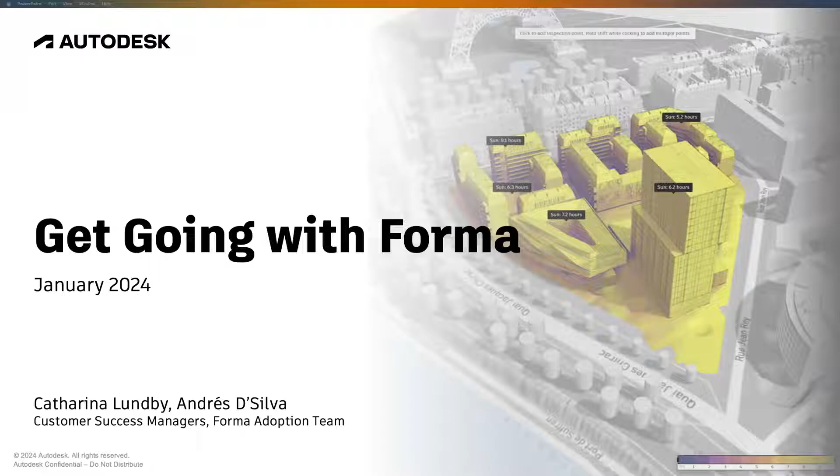We recently started running a new version of this webinar based on feedback from previous attendees, where it was asked that we do less talking with slides and more hands-on work in the software itself. So we'll be doing that today as well with a site in San Francisco.

So the agenda will be as follows. We'll start with some practical information, and then we're going to jump into Forma. As mentioned, we'll be working on a site at the San Francisco waterfront, which is actually the location of the Autodesk offices there.

It was recently also the case example of a Forma design contest that we ran, so we thought it would be fun to reuse it. Neither Andres or I have been there before, but we hope to get the chance to go to San Francisco at some point. And then at the end, we will leave some time for questions as well.

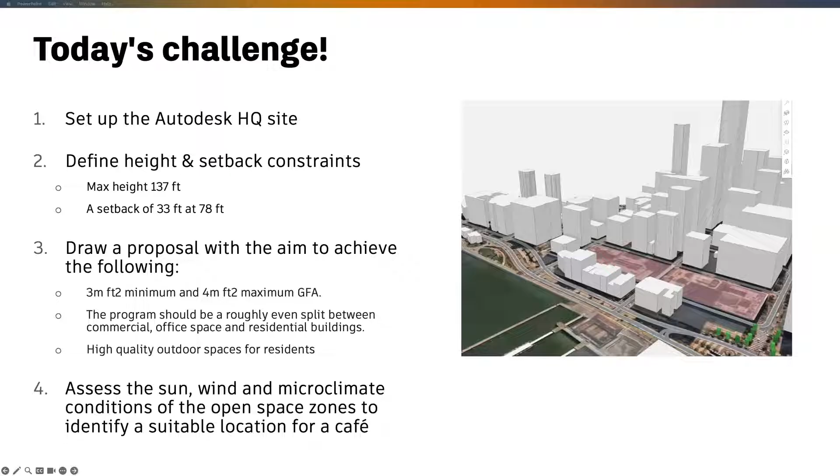Excellent. Thanks, Catharina. Great.

So sharing. This is our current demo hub. Just to bring, for those of you who are maybe not as familiar with this, you are basically able to join several hubs, either through your AEC collection or standalone licenses.

You have your projects here in current view, that's showing only my recent projects. There's also a members page illustrating where my colleagues are located as far as access types, and external collaborators will also be listed here. And then some more general hub settings for those of you who are an administrator for your hub.

Currently, my recent projects show a similar project, the webinar. But below this, there are more learning resources aimed at bringing you into the project, whether the demo project or your own project, to step by step show you how you can use Forma. And yeah, I'd also advise you to do this after this webinar.

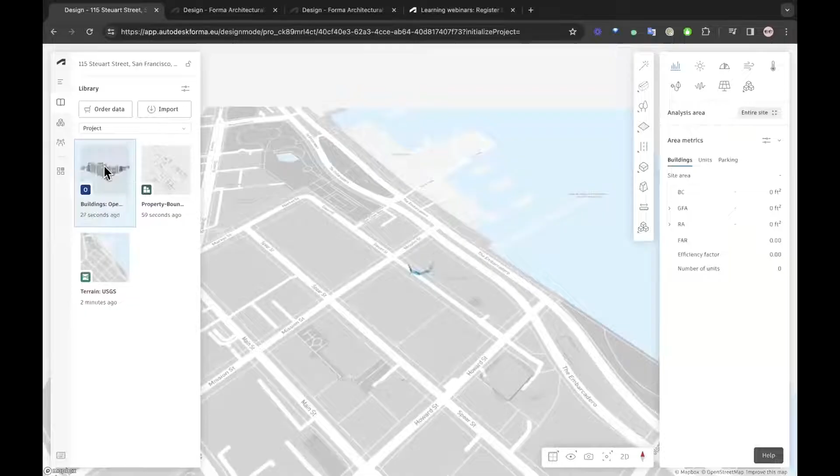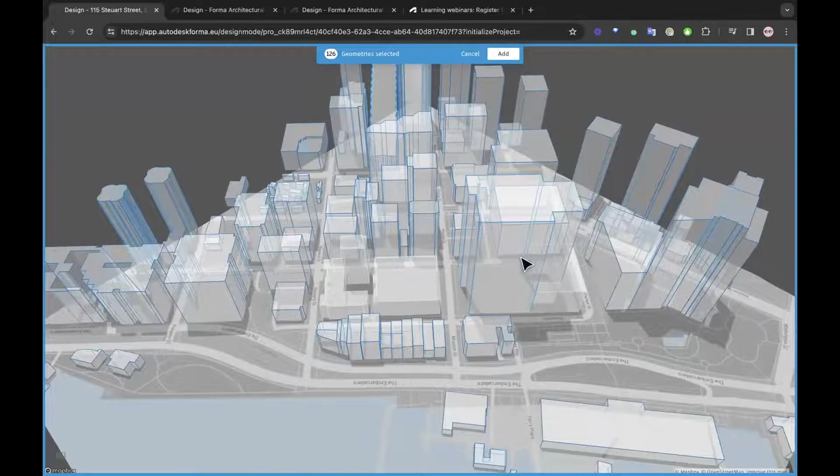So for our case, we wish to import the surrounding buildings and sort of leave a blank site for our new development. So I'll hold Shift and deselect these buildings. As you can see at the top, 126 geometries are selected. If I was keeping all, then these would also be added, and it would add up to 131. Great, so this is looking a bit more like a new development project, blank canvas.

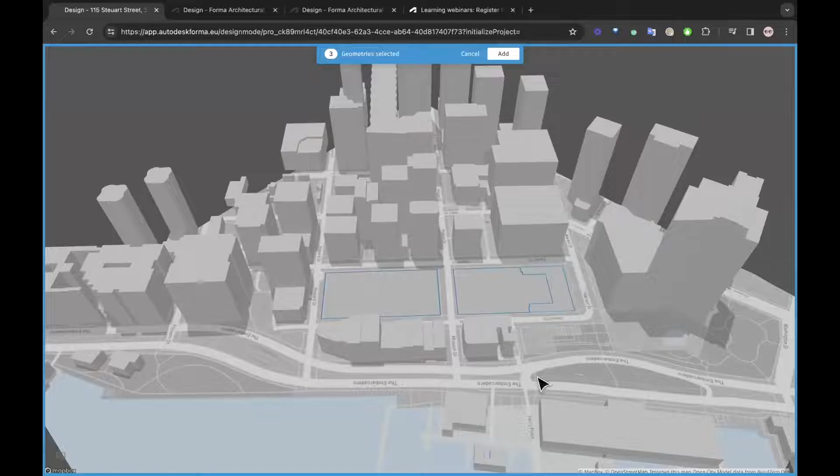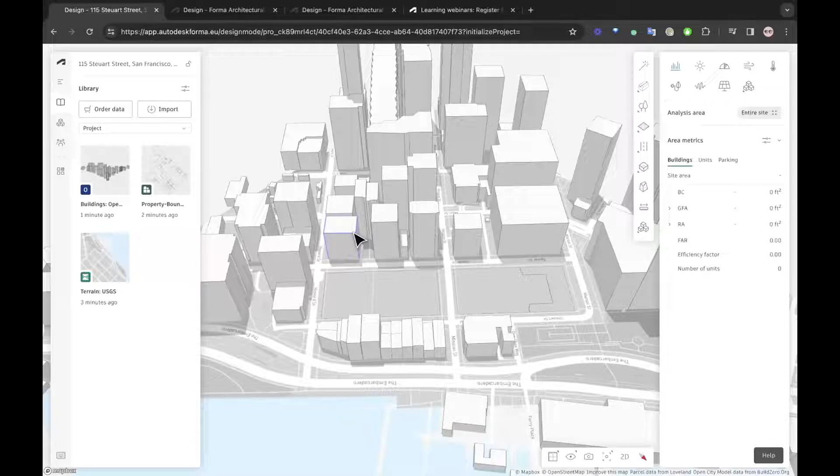One more data to add is the property boundaries. Again, same logic: you can select and deselect as you see. We're gonna go ahead and just add our immediate surroundings. And then it's good to maintain awareness of what this is actually meaning when we're dressing up our project.

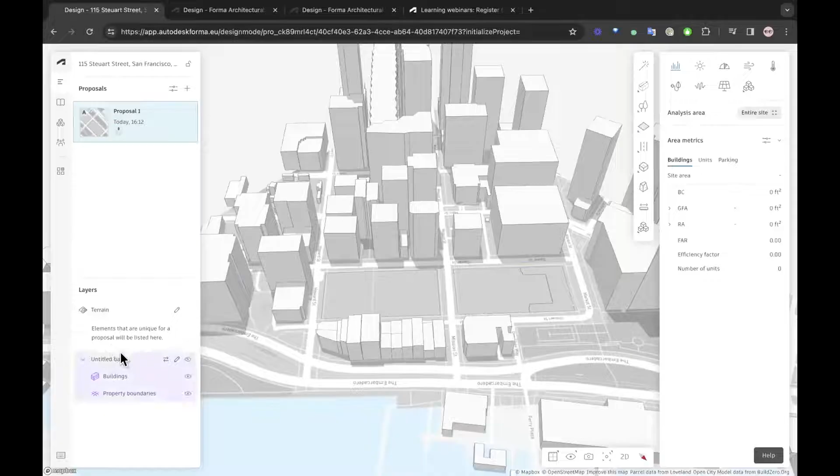To do that, we'll go back to our navigator. The navigator is part of our left-hand menu. It shows us what proposals we have and what layers we have. The layers that exist in Forma are either organized at the base level, so a shared component. If I hover above the edit button, it'll showcase a bit about what this base means. As you can see, the buildings and the property boundaries were automatically added to the base layers.

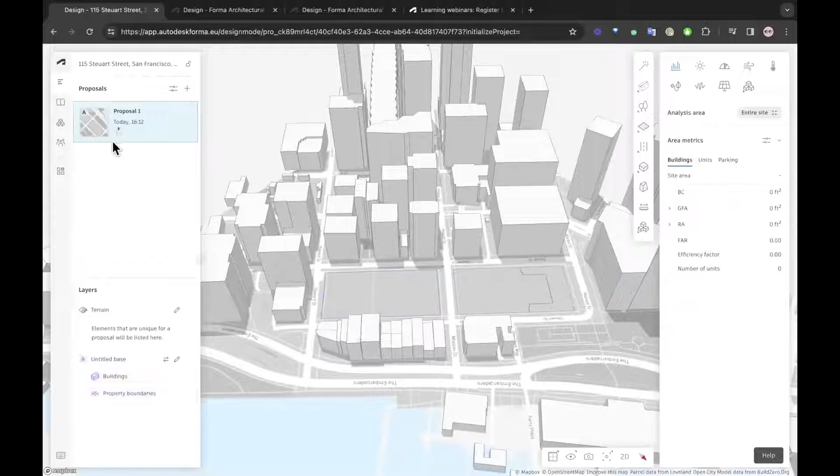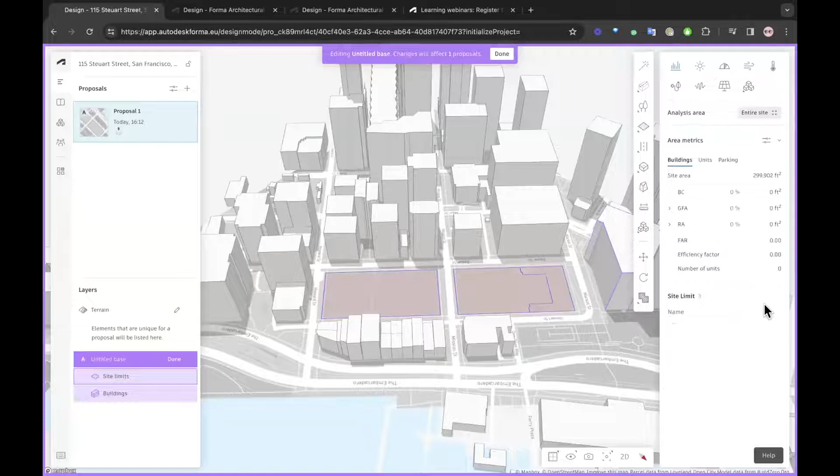And if we were to design a concept, they would be added to our proposal layer. This will be more evident and clearer as we progress. But to begin with, I will click Edit Base. I will select these two or these three site limits, and on the right-hand side, use the option to define these geometries as site limits. These are now also appearing red, just to illustrate that that's been done. And I can also see here the square footage for the site area.

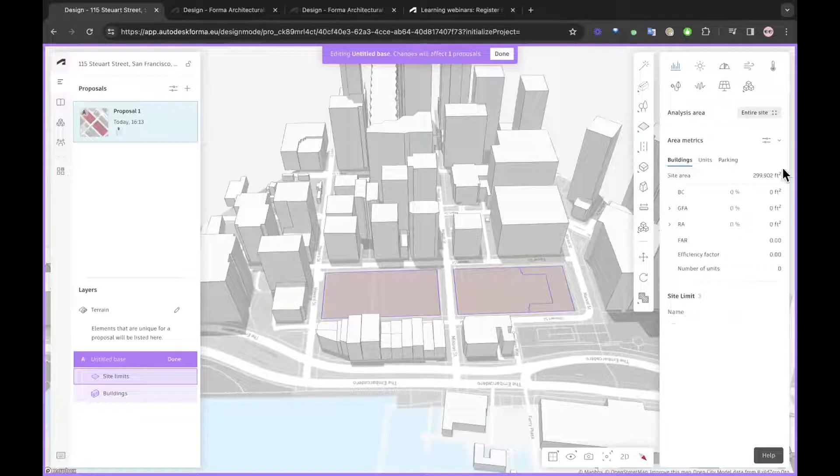So that's our first step. If I go back to my notes on what this challenge was all about, it was setting up the site, but then also starting to design some constraints.

We have a few constraints on these parcels. Typically you'd bring up your limits in the toolbar, part of the Forma user interface. You can navigate site limits, and design using property boundaries that were ordered, or draw them manually. I'll illustrate that on a neighboring plot.

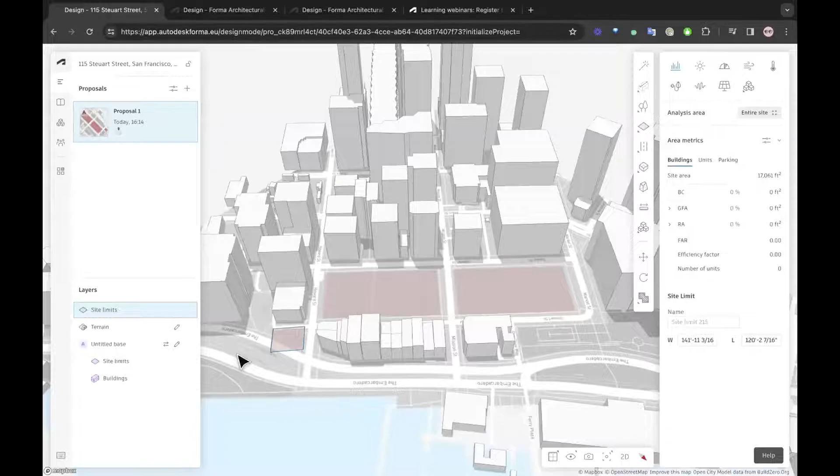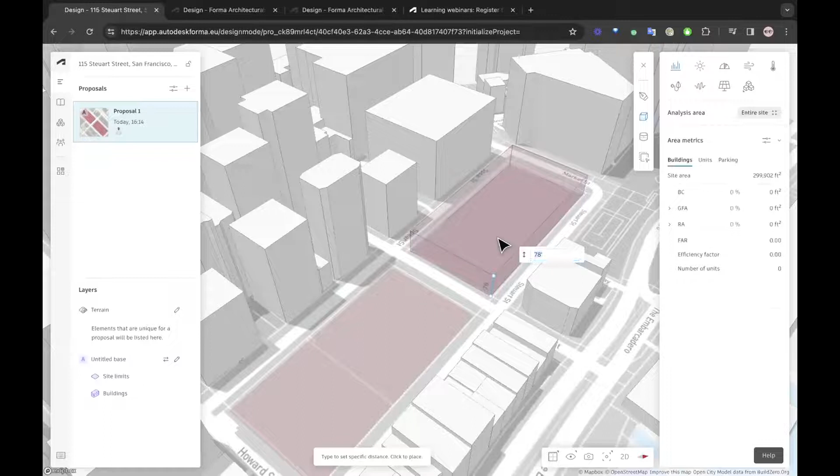This is essentially the same function using freehand tools. But for constraints, we'll scroll down to constraint and draw this using a cube as a shape. We can lock and snap to existing geometries, so I'll create a base replicating the site limit and adding 78 feet here. Then I'll select the direction, which is up.

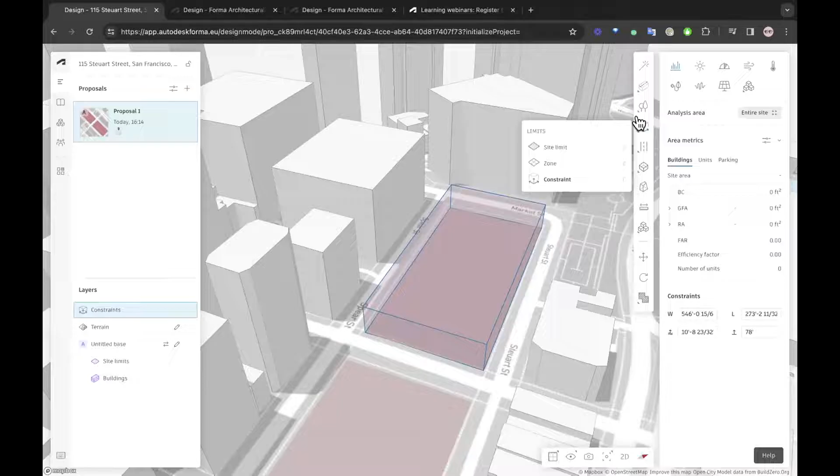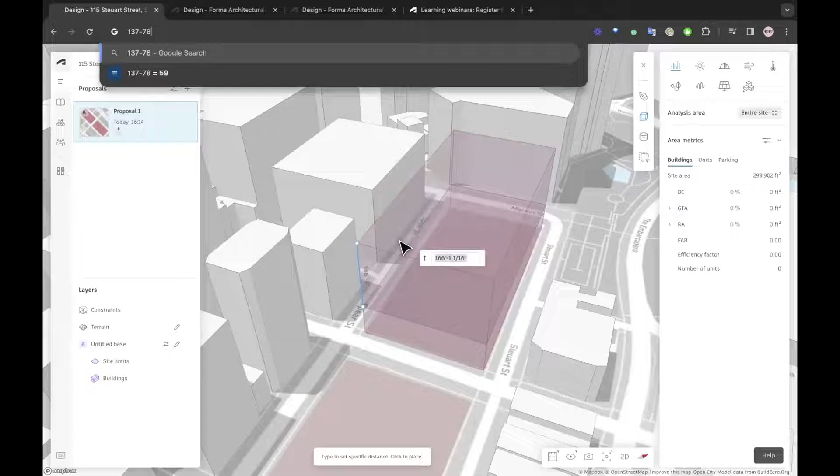So the setback was 33 feet. We'll build that on top for the moment. Then 137 minus 78 is... 59. So we'll go ahead and add this.

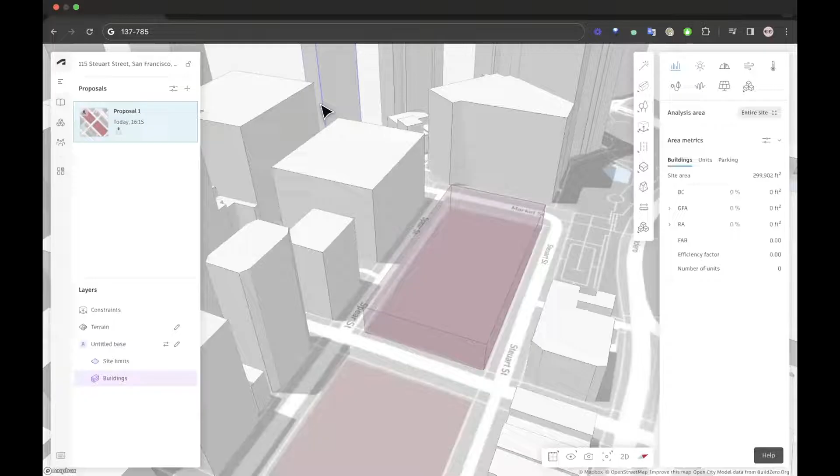Let's see, do that again. If you want to repeat any action, there's a nice tool I like to bring up called quick access. It tells you that if you want to repeat the last tool, the key is to press spacebar. So instead of finding constraint again, I can just press spacebar if that was the last thing I used.

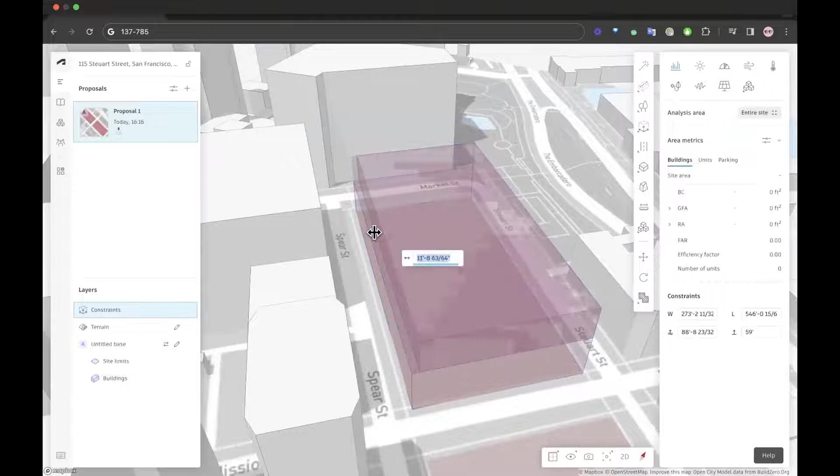So 59 feet up here, and then we'll drag this in 33 feet. Great, so this is our building envelope, or constraint, whatever you want to call it.

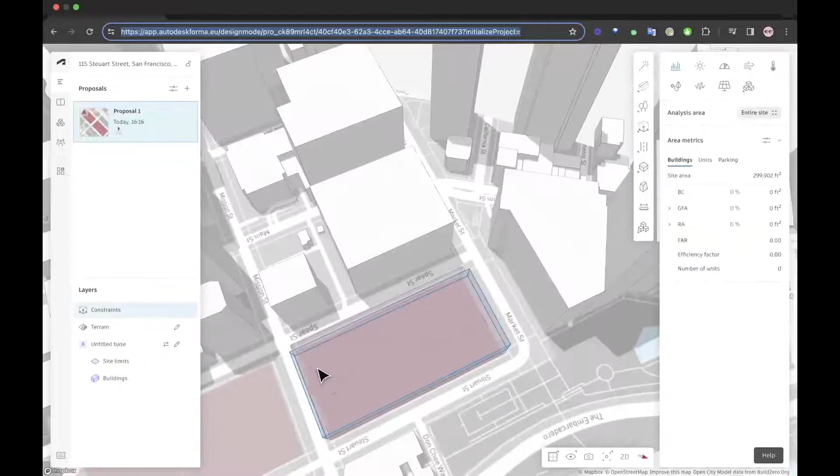What we'll go ahead and do now is assign some volumes. There's already some pre-made ones, but for this project we're going to design two buildings, one for office and one for commercial spacing, functions we wish to keep track of. We want to design volumes at a very abstract level, but also maintain a certain level of control.

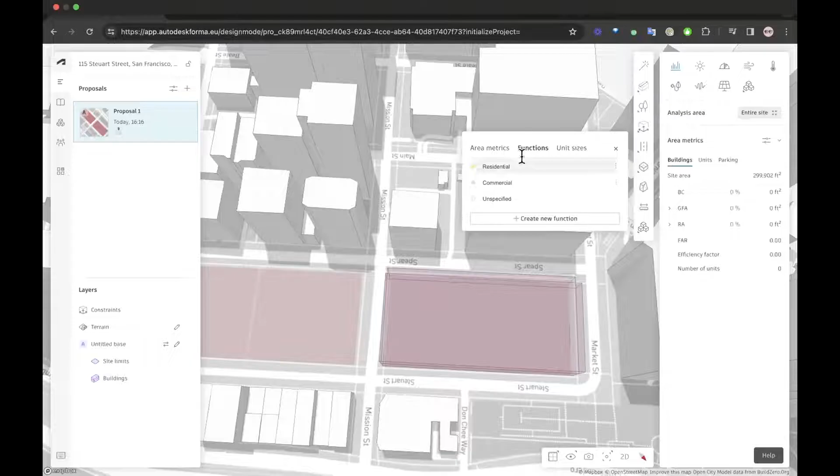To do this, we'll bring up our toolbar on the right, area metrics, displaying our functions. The default functions in Forma are residential, commercial, and unspecified. We wish to create a new function with a different color - it was commercial, office space, and residential - so we'll type office.

Here you can define different area calculations based on ratios. We can also use area metrics to create further metrics assigned to all functions or specific functions. So that's added here, and we can go ahead and design something.

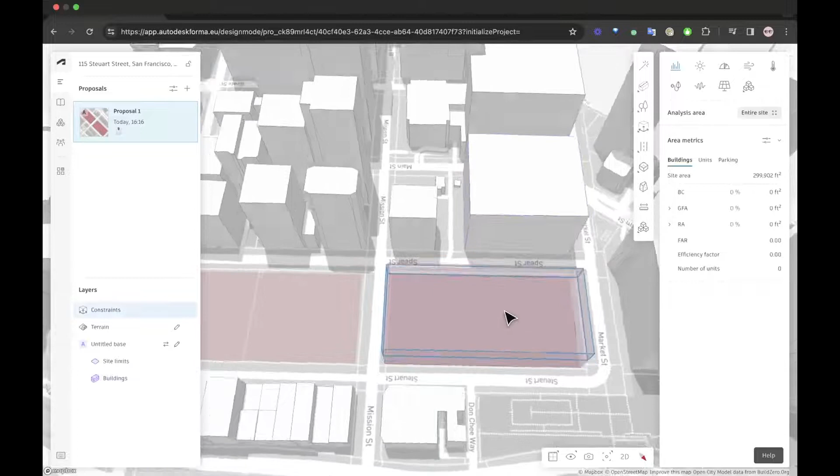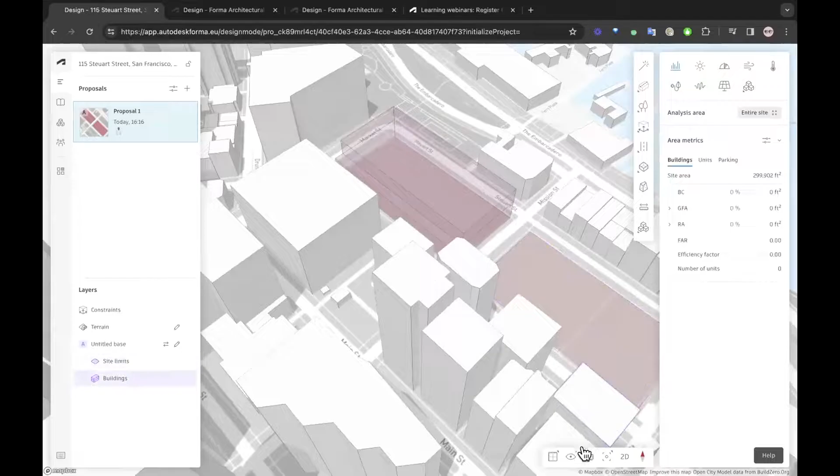Design tools are in our right-hand panel, with more tools on the left-hand side - we'll capture a bit of what they are. On the bottom right we have our map tools: we can show north, toggle between 2D and 3D, and save certain camera positions, which is useful if you're creating a report for a meeting. Let's see, here it is, save camera position.

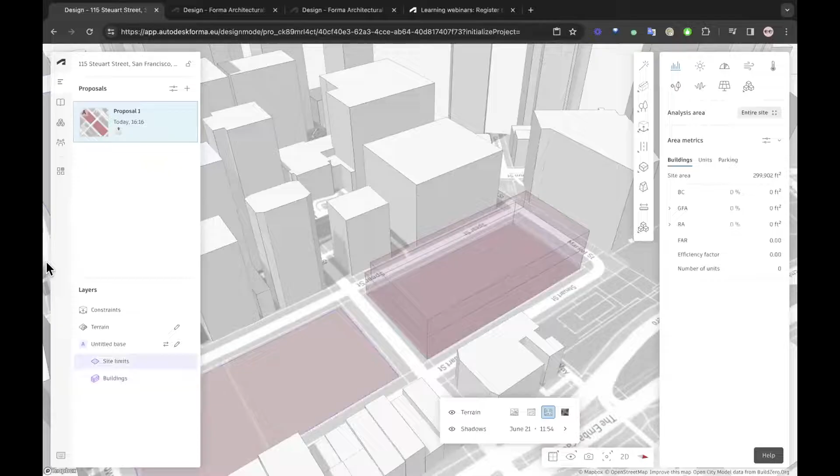And it's saving. We also have various display views, so you can showcase different shadows, and select terrain as an underlay. There are also, for everyone who's been testing it out, a nice extensions menu that enables you to add more functionality beyond what Forma has out of the box.

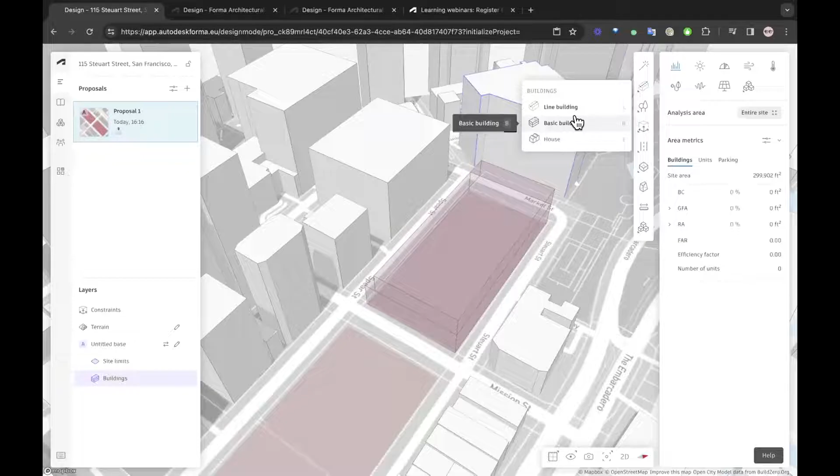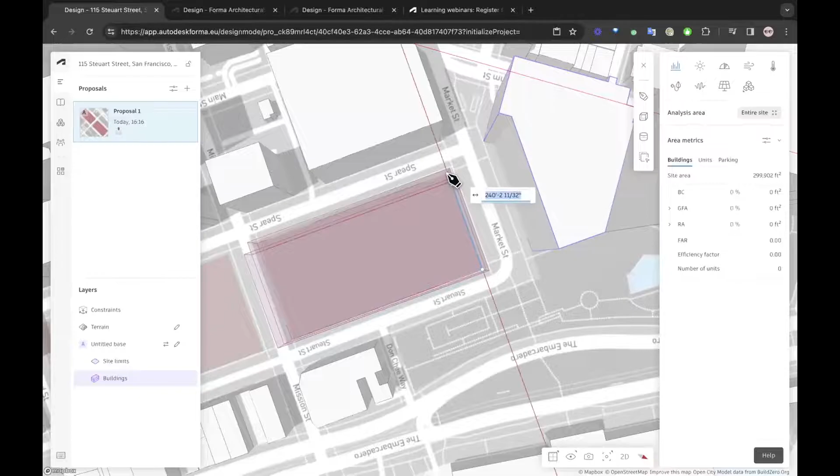But to begin with, we will design some volumes. So we're drawing a basic building, which is essentially a footprint with a height. We'll go ahead and lock that to our constraint here.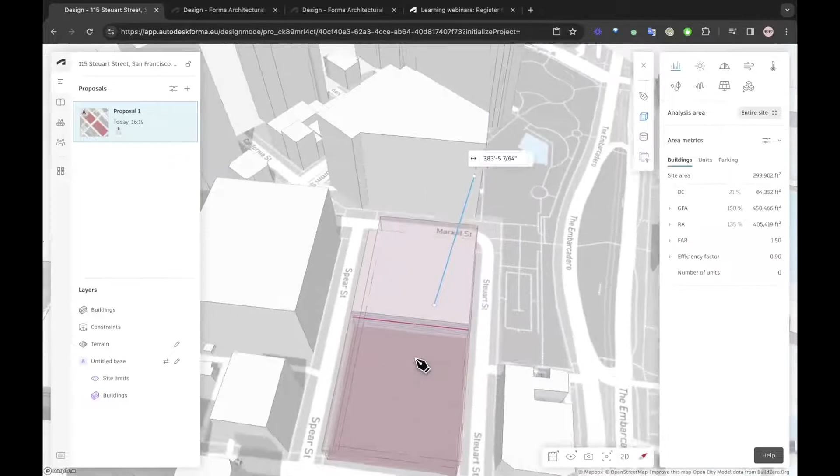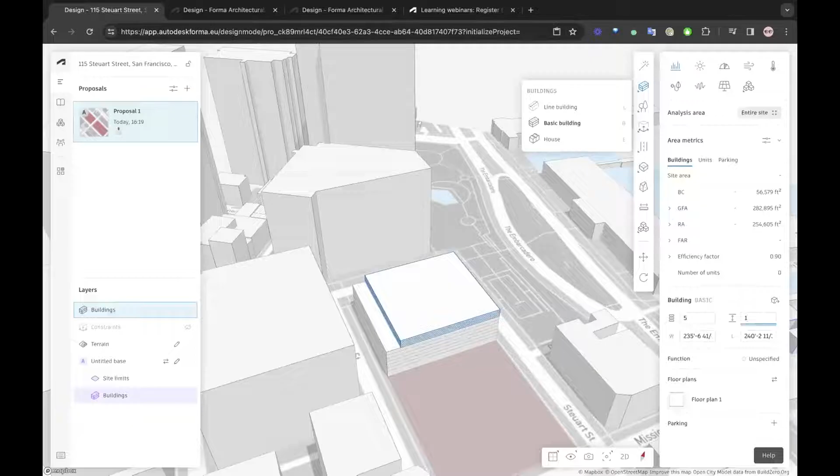Should I use the repeat, so I notice? We'll lock this. Yeah, okay, not perfect, but something close. Let's see, this was 10 feet perhaps. Yeah, great. So you can already see that the first floor here is actually slightly higher than the remaining floors.

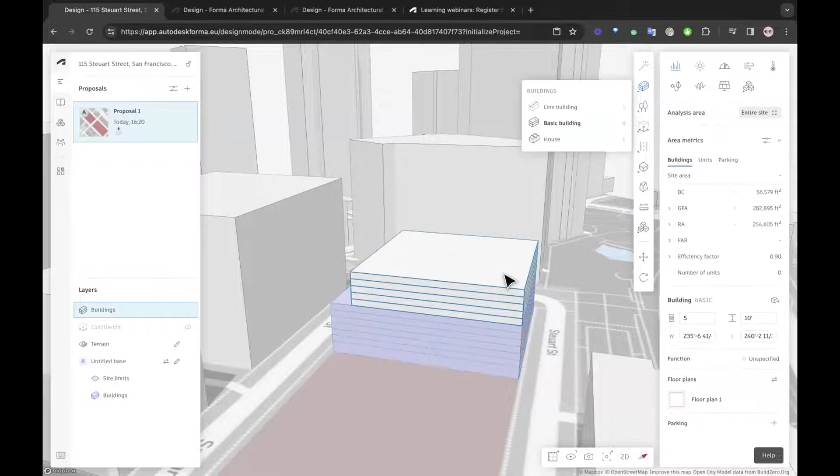That's actually quite intentional - that's typically the case. We'll change a function by selecting the roof of this first slab and assign it to, say, commercial. Then we'll select this slab and assign it to office.

What this has given me already, through the analysis of area metrics, is a breakdown on rentable area and gross floor area. If I select the entire site, the analysis area shows the building coverage, both in percentage and square footage, the gross floor area per function - commercial and office - and again for commercial and office on rentable area.

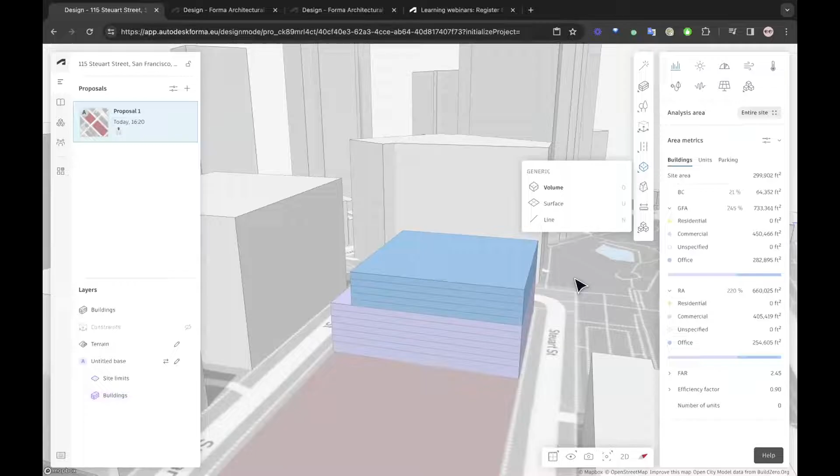We'll go ahead and draw one more volume before we switch into some more pre-made volumes that are a bit more suitable for our next phase of analysis on the site. I think this was something along this line.

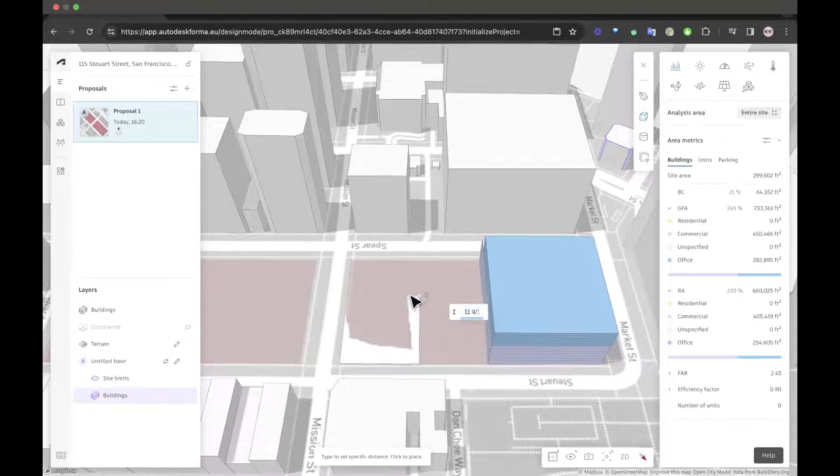And we'll snap this. Okay. Yeah, I'm actually not too sure. This was signed. Yeah.

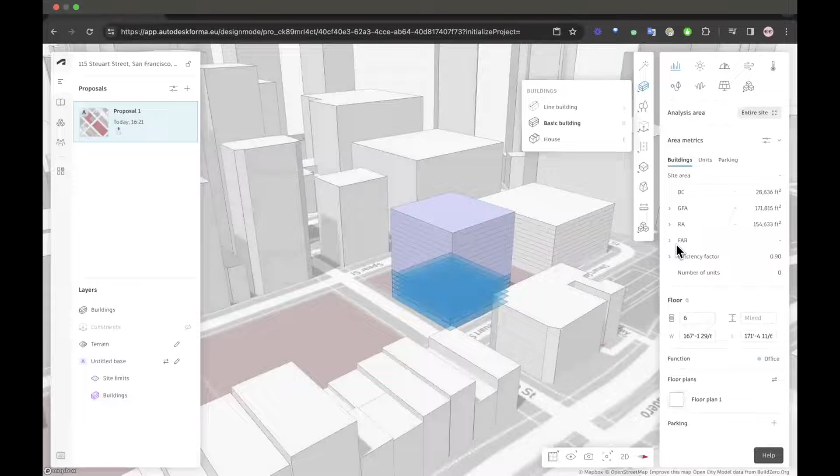Great, so just as a recap, we've started adding volumes to a project that we've defined with constraints. We've also brought in a lot of different third-party data, and wanted to showcase this to another colleague, so we'll go ahead and make them a collaborator. For project level access, you can also just copy an invite link—I believe it's valid for about 7 days or so. If I make a viewer, I can copy this link and share it here in the chat, and for those who feel free to join, you can join.

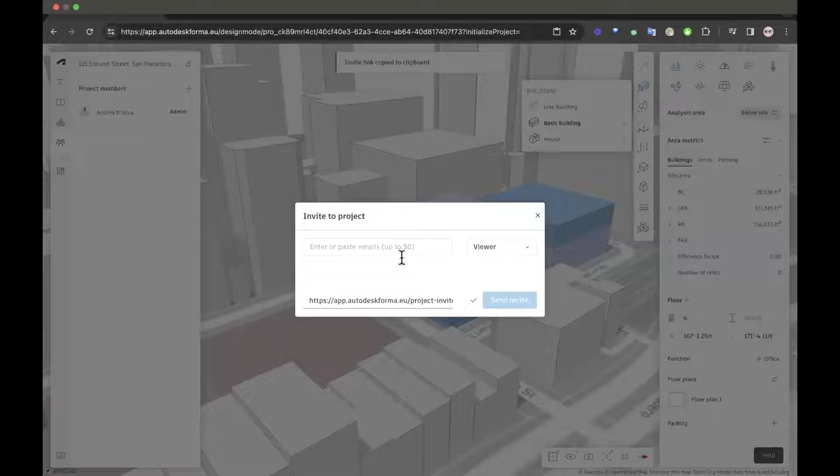Main idea here is, again, making everything cloud-based and easy to use.

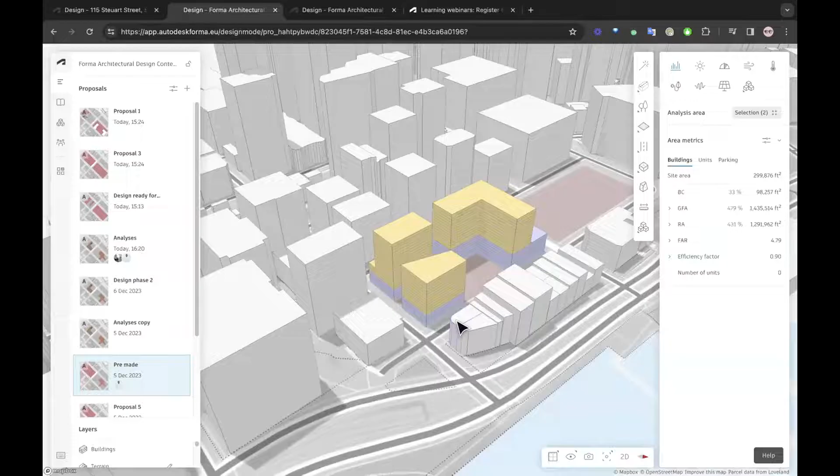Let's go into what we had pre-made. So this is buildings that Katarina has nicely modeled ahead of this webinar, and it's our left portion of the site, and then there is the full analysis or full project, which is again trying to build on from what we started. Additionally, there are a few vegetation elements that are, in this case, primarily for aesthetics, but could also be used for simulating differences when running wind analysis or solar analysis, to ensure that shadows play a role, or even for microclimate analysis, which is more and more a topic from our customers.

Great, I think that's where I turn the screen back to you, Katarina.

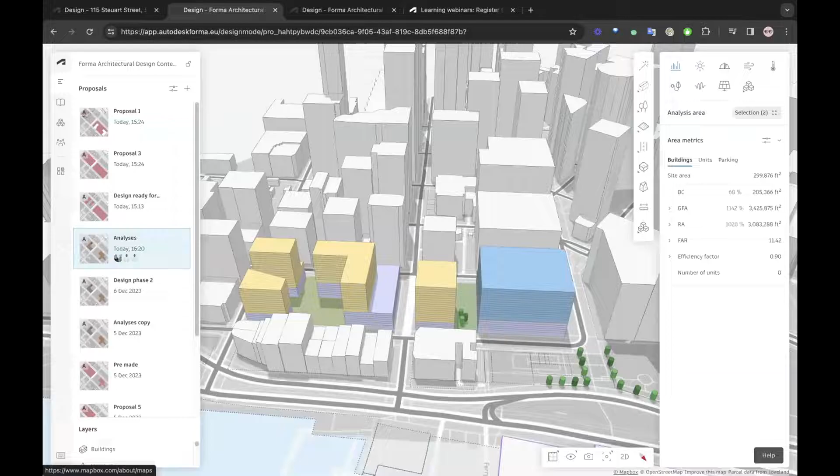Yes, wonderful. I just wanted to take a minute, Andres, to try to address some of the good questions that popped up in the chat. There were some really good ones. Just give me one second, because there is a link I wanted to share about product updates, where it's possible to see what we're working on currently and learn more about the roadmap. So let me share my screen with you. Great questions, by the way.

All right, can you see my screen with the Forma forum? Yes, sorry. Yep, we do. Can you, audience? Yes, absolutely.

Okay, awesome. So we had a couple of questions in the Q&A window. First of all, who is the target audience for Forma? Great question. So the target audience for Forma is really any professional working with early stage design and planning, so in the design and concept phase of projects. For example, an architect or an urban planner, but it could also be others.

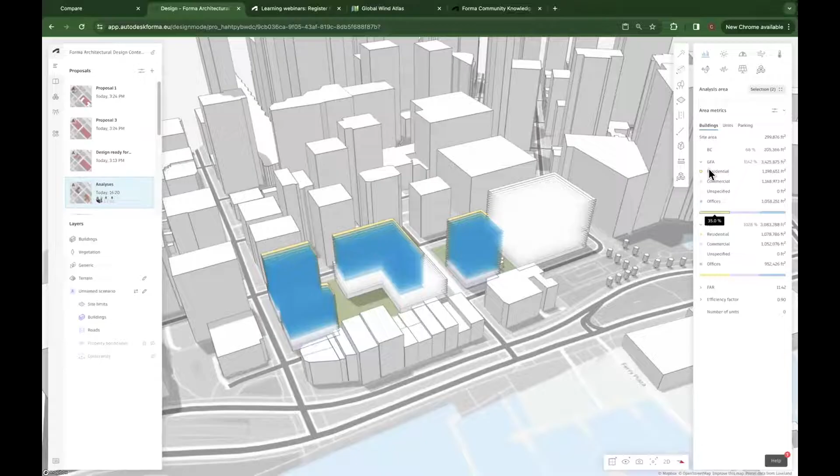Andres went through briefly the area metrics. These will vary by country. If you aren't familiar with rentable area and gross floor area, these are specific to the US because that's where the project is located. But if you're in Europe somewhere, this would be in meters, and you'd see slightly different metrics depending on where you are. So this is where you gain insight about that. Your unit count, we haven't drawn any units here but we could have, and also parking if you had drawn that.

And then there is sun hours, daylight, wind, microclimate, operational energy, noise, and as of quite recently, solar energy as well. Some of our channel partners are working on interesting new capabilities as well here. That's one of the main strategies of Forma, to build an open and extendable software so that third parties can provide more, perhaps local, analyses for instance.

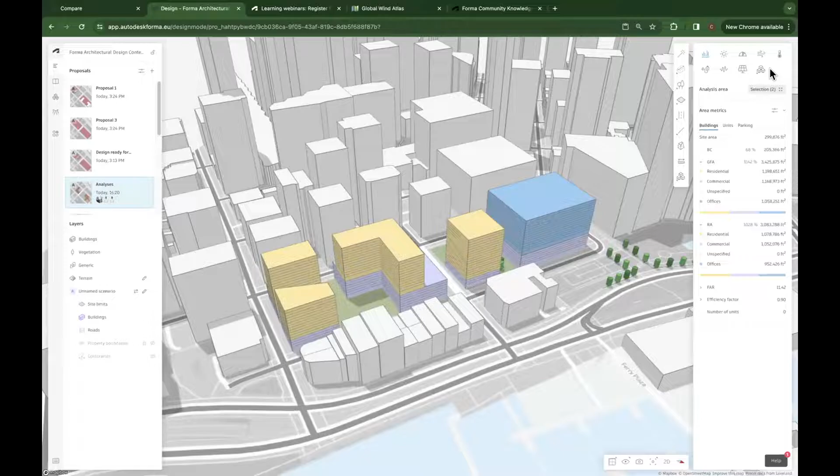So what I wanted to do now is take a look at some of the analyses, and we can start with sun.

The way the analyses work is that you have to choose the area you want to analyze. We can do that via the little selection window in the top right-hand corner. By default, we select the site limit, but you could also draw a zone. Via the limit icon here, you can see site limit and then zone, if you wanted to, for example, just analyze one side or the other, or a much larger area.

Selecting the site limit, though, means you're going to see the sun analysis just on the site limit, but of course the surroundings are taken into account, so in terms of shadows and so on, that's taken into account.

Then you can choose the analysis date. We've selected two dates here, but you could add as many as you want: March 21st and June 21st. Then you run the analysis. Depending on which analysis it is, it will take anything from 30 seconds to a couple of minutes. For the wind analysis, it can take up to an hour or even more because it's very heavy, but there we have an AI-based rapid version as well.

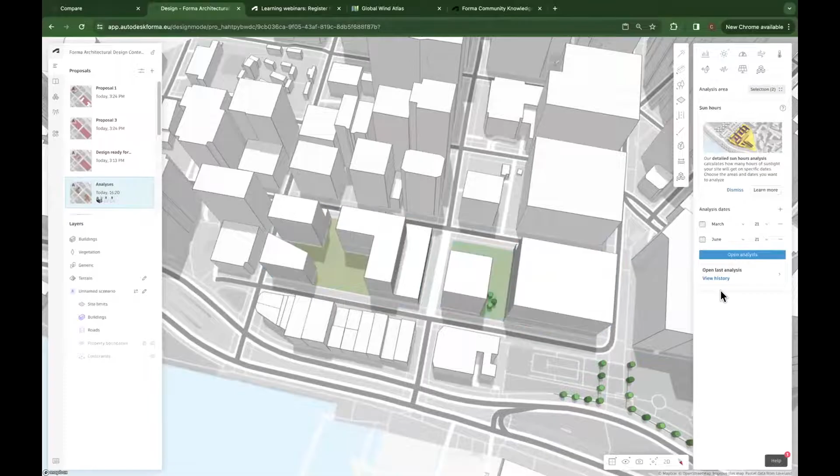So there we go, it's ready. Let me see, I've got my Zoom window slightly in the way. Open analysis. There we go.

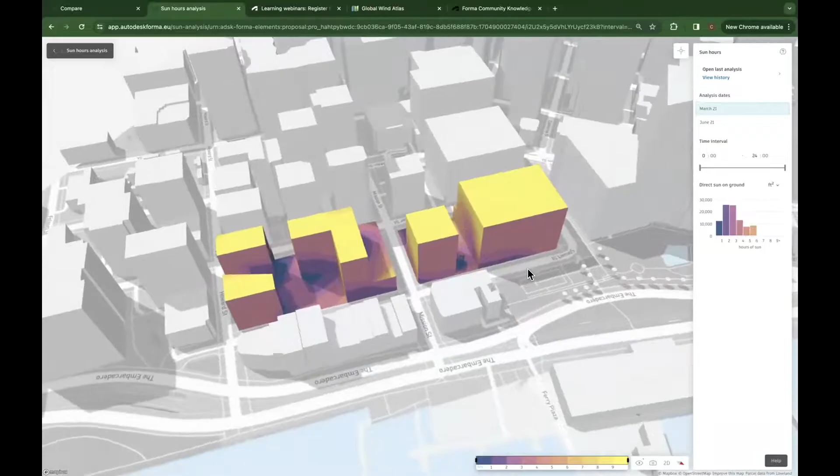All right, so we are now inside this analysis mode. What we're looking at is the number of direct sun hours on the facade and ground on March 21st, between these hours and these hours, and you can change the time interval as well. The colors correspond to the number of hours, so you can see this little scale bar or legend at the bottom. The darker the colors, the fewer hours of sun.

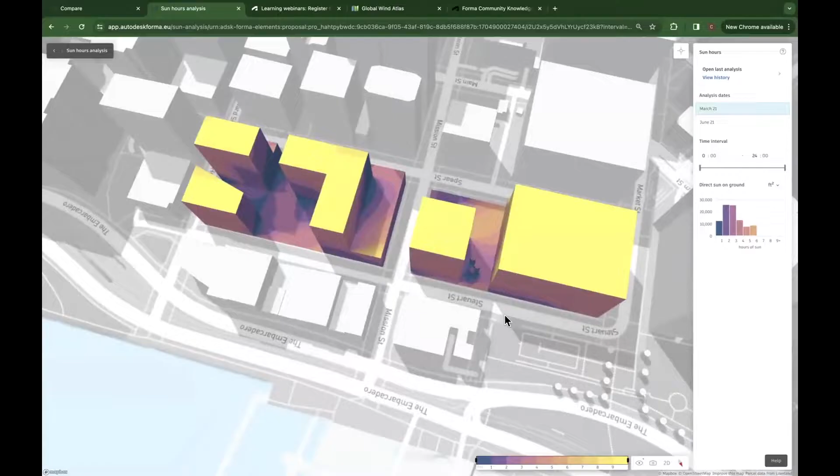So we can go ahead and inspect particular points. Maybe we want to view it more from a 2D view, if we're going to stay true to the case of trying to establish where we could put an outdoor cafe. You have this inspection mode in the top right-hand corner where you can click on particular points, either on the facade or on the ground, to inspect the qualities at that particular point.

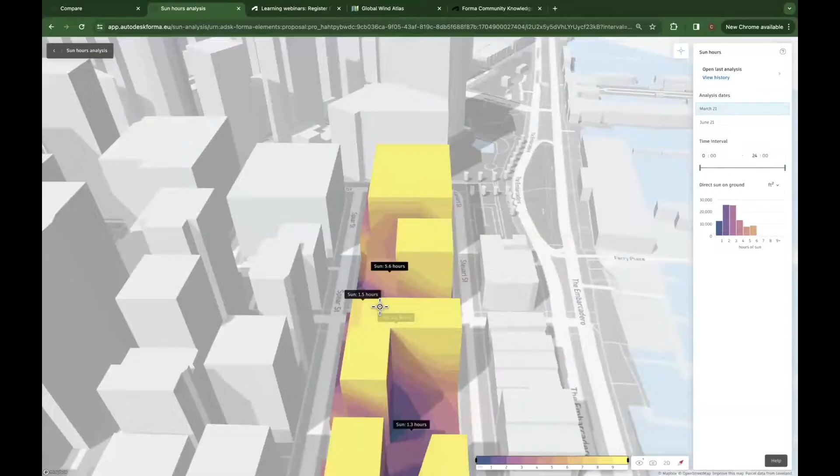So here on the south-facing outdoor space, we've got 5.4 hours of sun where I clicked, and then we've got 0.7 hours of sun between the two buildings here, so slightly poorer sun qualities there, unsurprisingly. Then we've got slightly darker north-facing facades than south-facing facades, but all in all, quite good sun qualities on the facades. And then we could also have looked at June 21st as well.

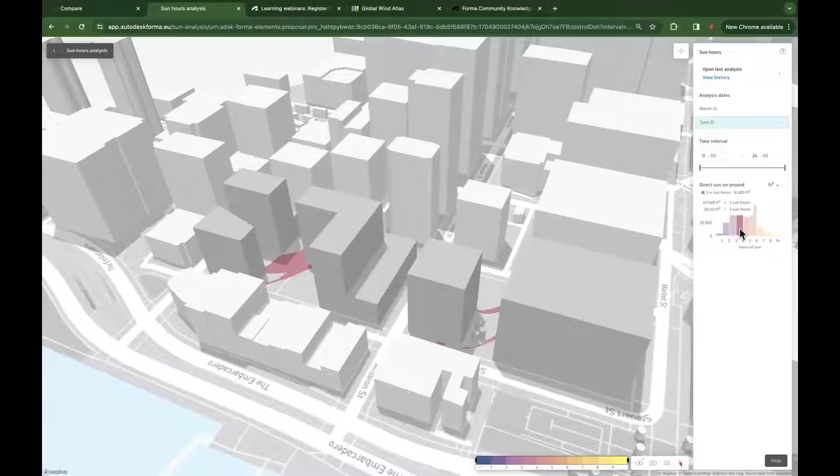If I switch the date, you'll get an updated analysis plot. On the side, depending on the analysis, you'll have different graphs and statistics presented to you. So here we have an overview of the number of square feet that are sunlit for a given amount of hours, in different brackets, which you could view in square feet, percentage, or square meters if this were in Europe. All in all, quite good sun conditions - we've got a really nice bright space over here.

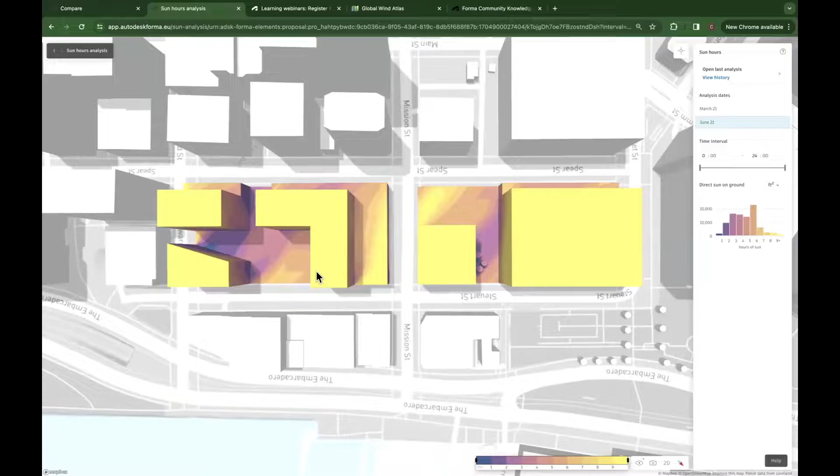Quite a nice courtyard in the middle here as well. Some challenges with sun between the two tallest buildings. So then I'm going to return.

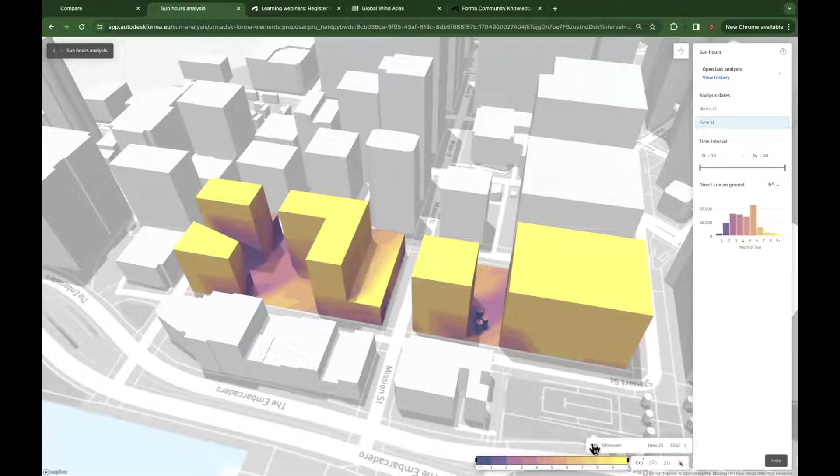One thing I also wanted to show you, you can filter on the legend here. So if you want to see, for example, all the areas with more than 4 hours, you can filter there. And you can also do a sun, like a shadow study at the bottom here, looking at different times of day.

Okay, then I'm going to go back. And the next thing that we can look at is the wind conditions. So the wind icon is the fourth one along. And here it's important to emphasize that there are two different analysis methods when it comes to analyzing wind, and also two different types of insights that we can get.

For wind and also for noise, we have a rapid version, which is the one that you see that popped up very quickly on screen here. And I think the best way to explain this is if I open up via the Help Center, because it's a good way of showing you the Help Center as well, via the Help button. If you type in wind and then open the introduction to the wind analysis, there's a little table here that explains the differences between the rapid and the detailed wind analysis quite well.

So the rapid wind analysis is AI based, trained on data sets that have been run using the detailed version. This can be useful as you're designing to get quick input. It updates in almost real time when you're changing the buildings, so it's good for giving directional input on your designs and seeing tendencies. However, if you want to document your results, to put in a report, for example, and you want it to be more specific, more accurate, more detailed, then we would recommend running the heavier version. Here you can see what technology it uses, the detail level, and so on. This is based on data from something called the Global Wind Atlas.

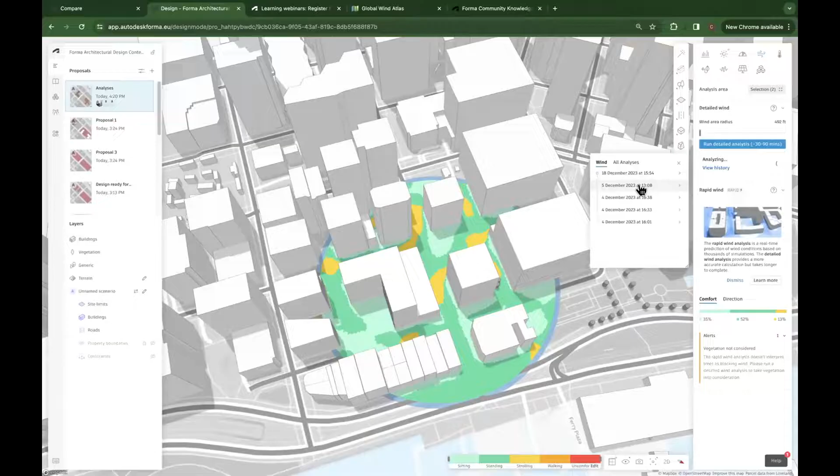So let's take a look at the detailed one. As you can see, this can take a while to run, so we've triggered this one previously. I think we have one good one from December that we can open up here.

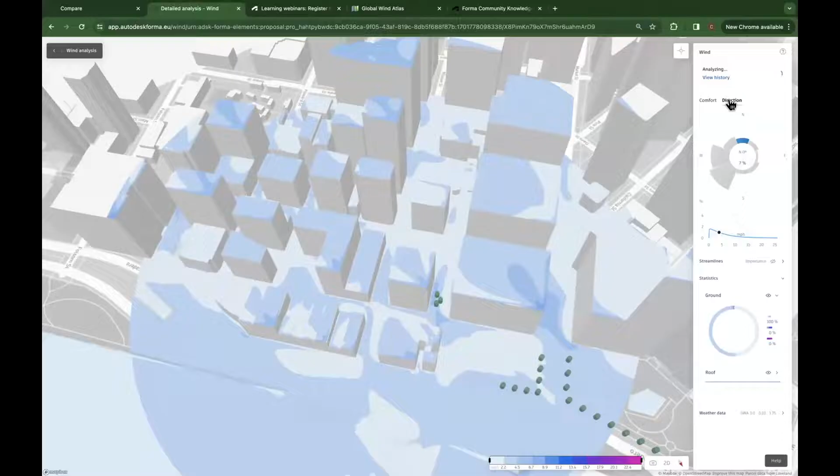Now, there are two insights we can get from the wind analysis. I'm going to start with the one called wind direction, because I think this is the most intuitive one. It shows wind flow patterns relative to this compass or wind rose here. You have different segments for the directions that you can click on to see what the situation looks like if we, for example, view wind from direct west, wind from southwest. The size of the segment suggests that southwest is the most prevalent wind condition in this area. Then you have a little graph here where I think the median wind speed is the one that's selected, but you could look at a drastic situation as well if you wanted to.

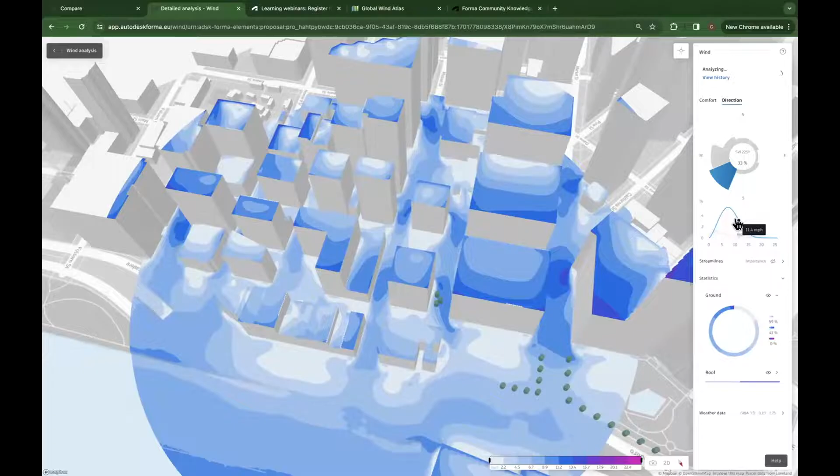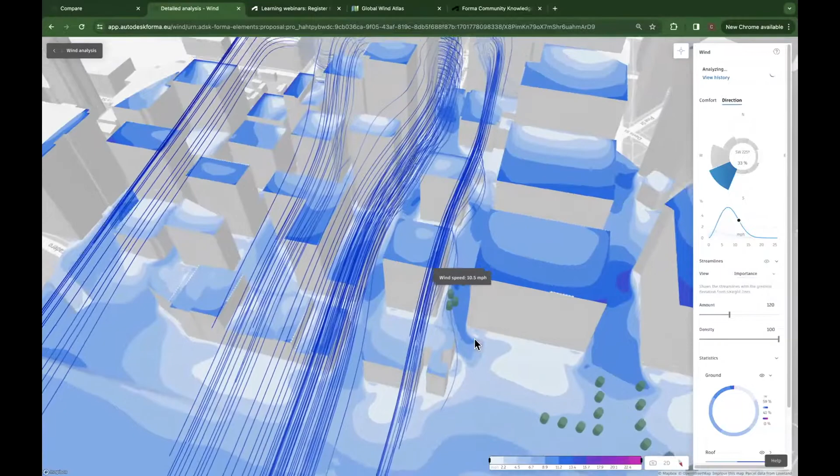And then we could also turn on the wind streamlines. Let's see if that worked... that's a shame... maybe it's just taking a while to load. There we go.

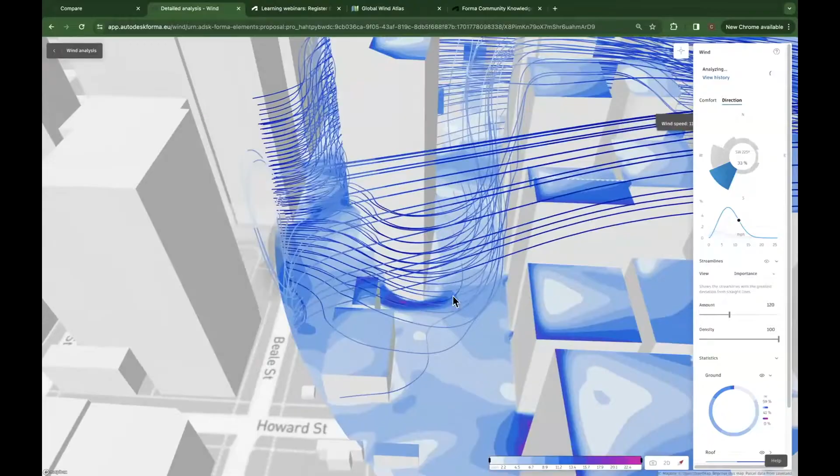And you can also see the streamlines and start to identify areas that perhaps you can see there is downdraft happening or wind tunneling effects. You can see it quite clearly at the back of the site here along this really tall building. You have the wind being pushed from southwest between the tall building and the small one, and you're getting this wind tunnel right there.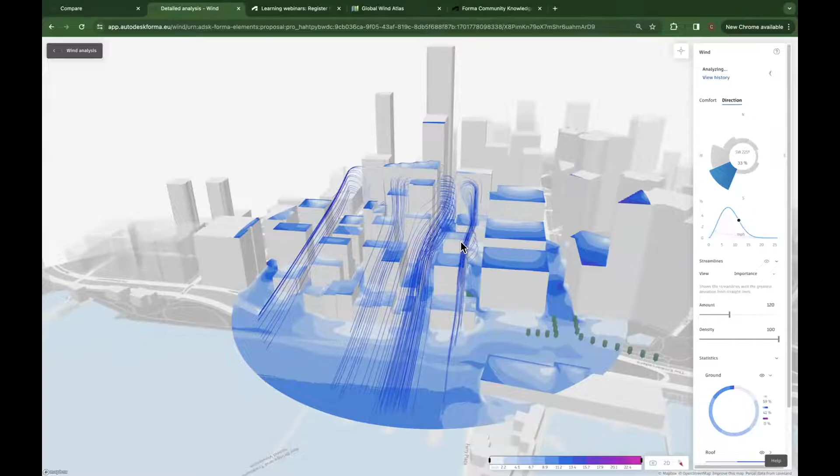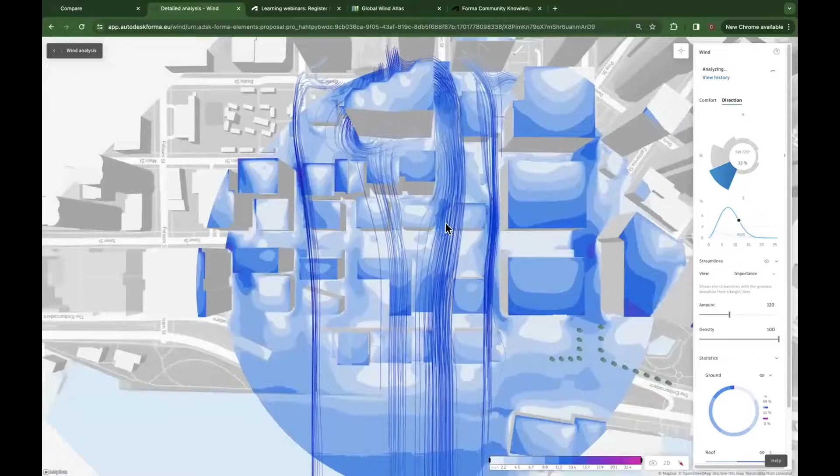So this is really helping us start to identify what the wind conditions are like. You can see, even though we have these super nice sight lines through the city towards the San Francisco Bay, it also means that when we have wind from the south, it's quite windy along those open streets. So on our site, you can really see that between the buildings, especially, and on the plateau right here. However, where we had the sunny space earlier, in front of this building, it's actually quite quiet, not that much wind. So that's really good to know when we're thinking of where to place our cafe.

You also have some further stats down here that you can look at.

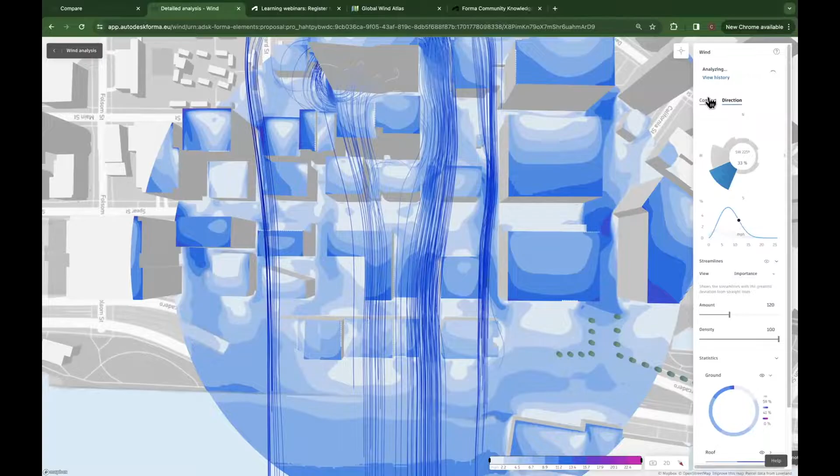Then we can go back into our analysis view. The next thing we want to look at is microclimate, because now we know what the sun conditions are like, we know what the wind conditions are like, but we want to see what this really means for a person who's going to be using these spaces. What's the perceived temperature like?

We've also run this one previously, going to open the one from December 4th. The microclimate analysis combines the results from the sun analysis, the wind analysis, and also daylight analysis, and considers local weather data in this area to tell us something about the perceived temperature on the ground. This is quite interesting because while the air temperature can be one thing, the way your site layout is, the building form, can have a huge impact on the local climate because of shading and how it affects wind. So that's what this analysis is useful for.

Here you can see you can choose which month of the year you want to look at. Let's take a look at June, since we had the sun analysis in June. Here you can see the average air temperature in June in this area, I think the data goes about 8 years back, 70 degrees Fahrenheit as the average there. We could also consider a warmer climate or a cooler climate. Then you can choose the wind direction. Since southwest is most prevalent, maybe that's the one that's most relevant to look at. At the bottom here, you can see the weather data that's assumed, the humidity, cloud cover, and so on.

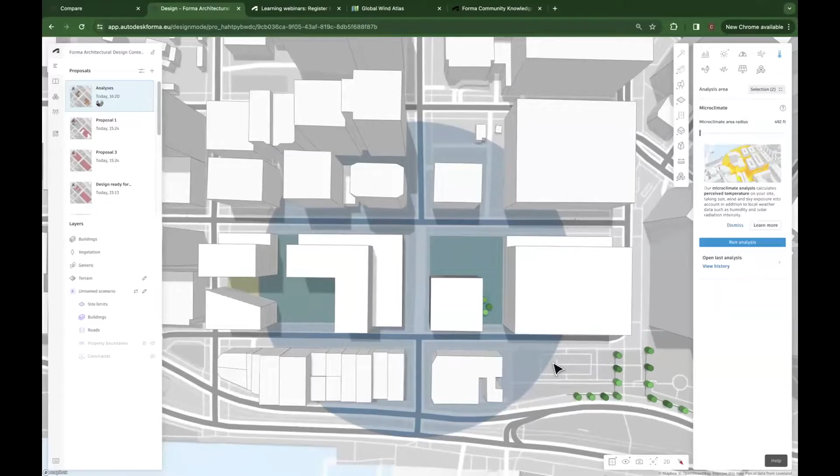How are we doing for time? Do we have an hour? We have an hour, right, Andres? Yeah, suddenly got unsure if we had 45. Then we'd be a bit late.

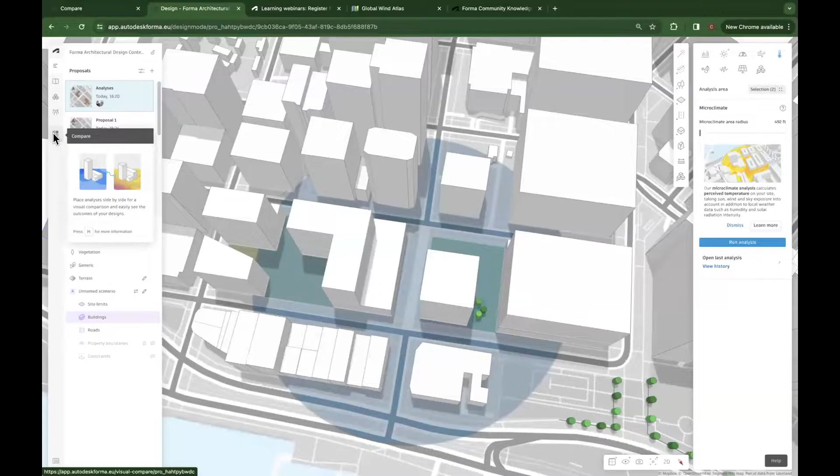All right, then finally, what I want to show you is how you can see these different qualities side by side. This button is maybe a little bit hidden, but on the left-hand side at the bottom, you have a compare mode. So I'm going to go into that.

The purpose of this mode is to view different analyses or proposals side by side, to see what your alternatives are and what the different qualities are, and see the trade-offs. On the left-hand side you have your proposal menu and the analysis history. We've triggered a lot of different analyses on this proposal.

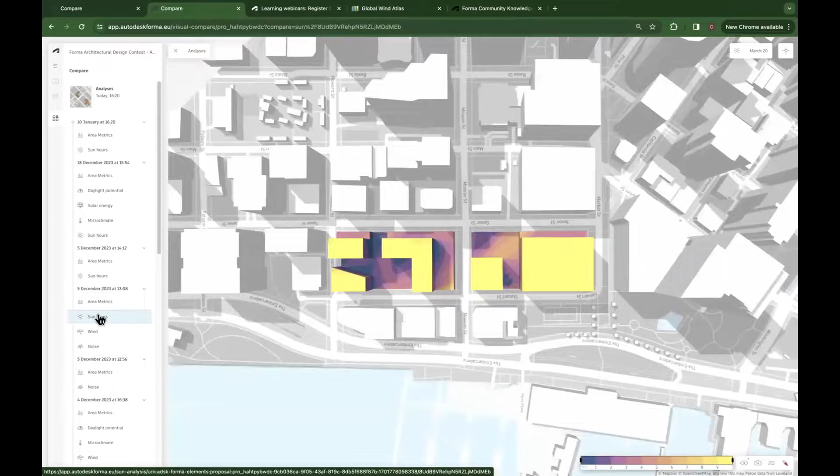Let's choose sun hours, and wind, and also microclimate. Here I can see that I've got March 20th selected, but I actually want to look at June since the microclimate analysis has been triggered for June.

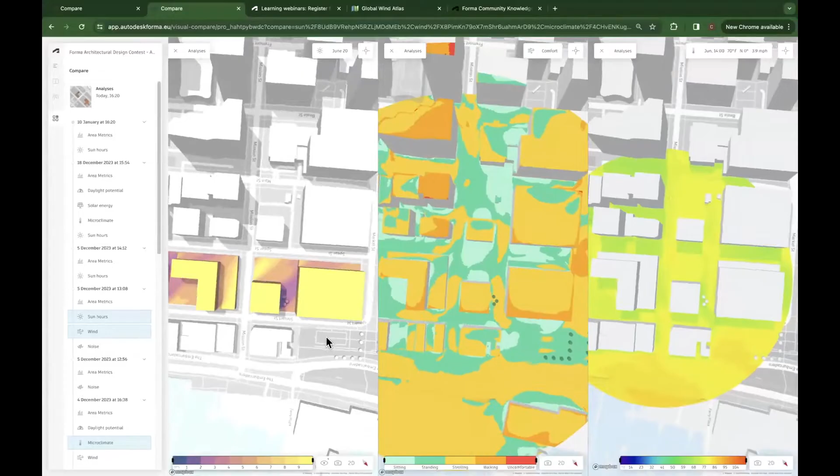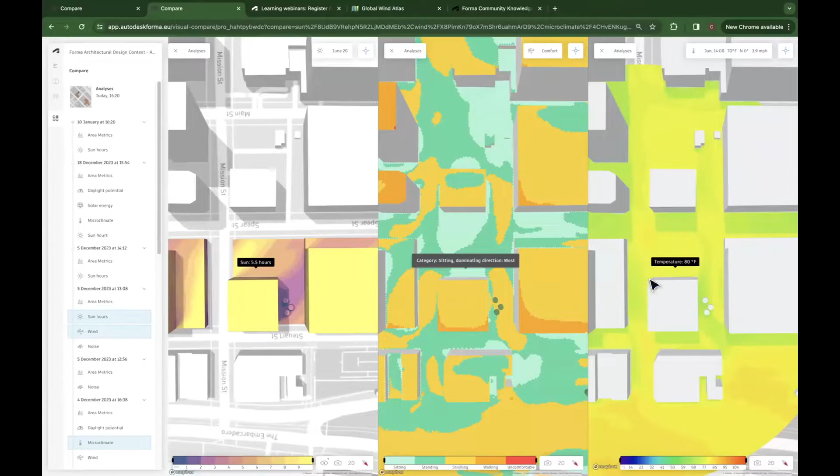Here you have a side-by-side view of the three qualities that we considered. You can also change between comfort and direction, and also the month and so on. Now we can really start to inspect this area side by side. So we've got a nice sunny space, 5.5 hours of sun during the day in June. It's quiet, suitable for seated activities. It's got a perceived temperature of 80 degrees Fahrenheit, maybe a bit too hot. If so, we could start to look at other spaces.

If you wanted to use this for a report, you could take a screenshot with these panels open so that you also get the stats, or you can use the camera icon at the bottom to do a screen capture and get the PNG file.

Another thing worth mentioning for the project as a whole: you can also save different camera positions. If you know you want a very particular angle or view, you can save that camera position and then go ahead and twirl around and look at other things, and always return to it so you get the side-by-side view in your reports and so on.

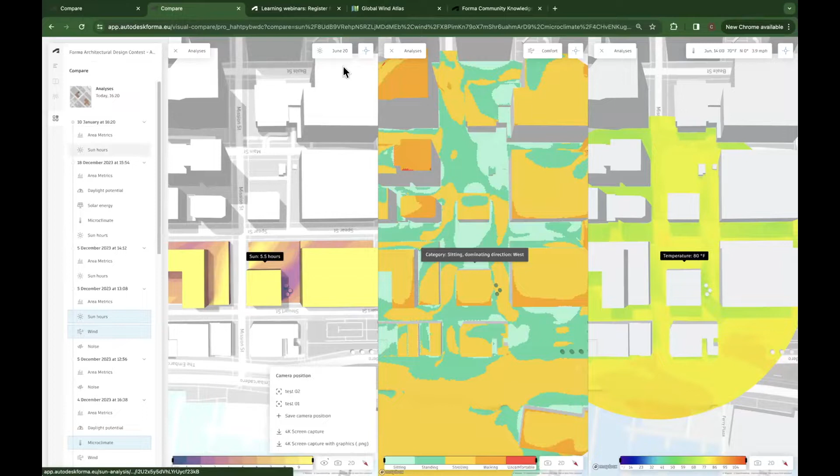All right, then we will go back into design mode.

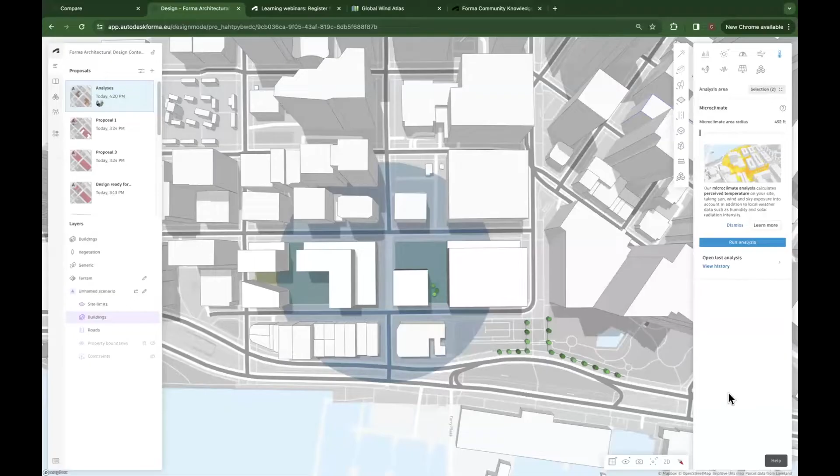Maybe one thing worth mentioning, which we haven't talked that much about today, is where you can find different extensions to Forma. As I mentioned, we want to make Forma as open and extendable as possible, meaning third parties have already started helping us create different tools and functions. The extensions menu is also located on the left-hand side, and if you open that, you can add an extension and browse all the extensions currently available.

So for those working with Revit, here you can download the Revit add-in. For those working with Rhino, you can download the Rhino plugin. Recently we also have a Dynamo integration and lots of other exciting things here, like a parking demand calculator and so on. Do check that out if you're interested, especially in cross-product workflows. These are still under development, but we're working hard to improve them.

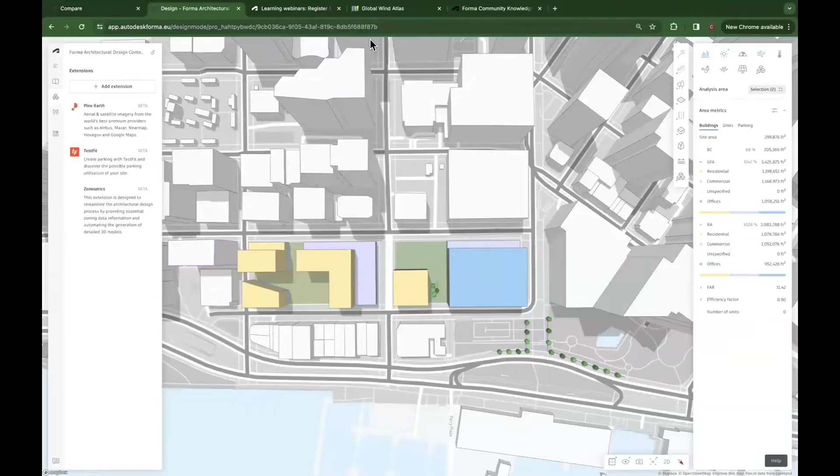All right, then we have a couple of minutes left. Andres, maybe we can go to the slide showing the upcoming webinars, and then we can do some questions. So we're actually coming to an end—if there are no further questions, we could just showcase the PowerPoint again.

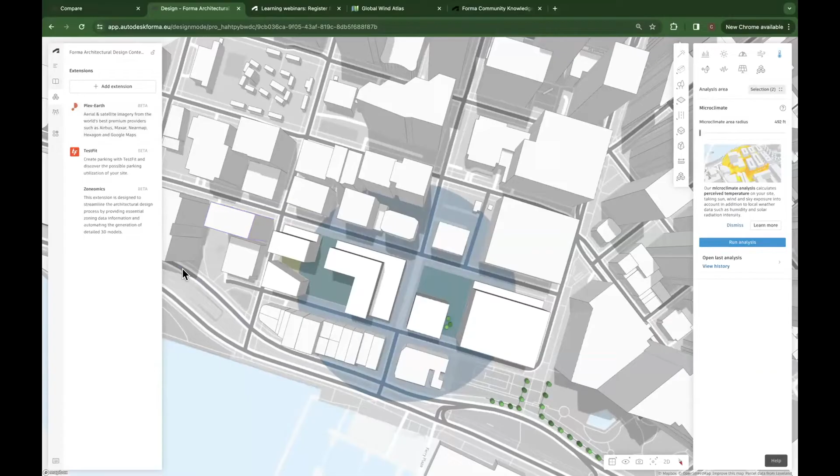Last year we started the webinar series to enable everyone to get started with Forma, and now we're doing an iteration on the webinars to do both onboarding and a deeper dive. So from this month, in two weeks' time, we'll be doing a deep dive on the housing tool. The house tool was launched just before the holidays and enables you to draw fairly simple surfaces or areas and populate them with houses. We'll also be doing this onboarding webinar in three different cases.

What we did today was a development project. We'll also be looking into a more master plan project, and then finally a low density project, maybe leveraging the housing tool as mentioned. These three cases will have a lot of similarities, so it won't be teaching specifics, but it will give you different context in what Forma can be used to do.